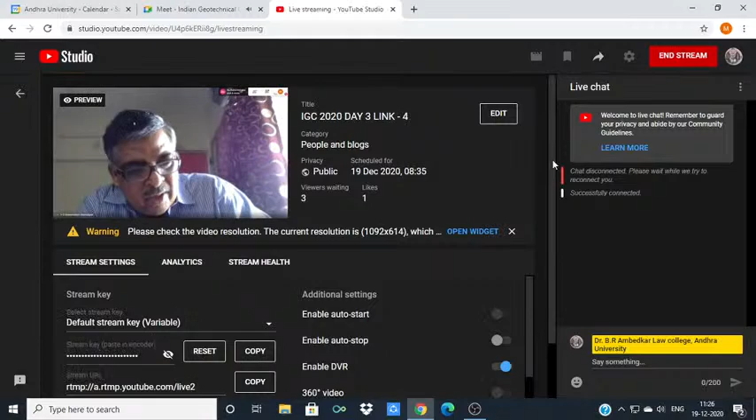Yes, in Calcutta, it was very nicely conducted. So everything is going fine with you? Yes, sir. IIT Bombay is relatively, the number of cases have reduced. That's what we talk nowadays. Only number of IIT Madras has increased. That's what we are talking with Professor Robinson, who is the chair, and Dr. Rajesh Sathiyamoorthy from IIT Kanpur is the co-chair. We were just talking about that only.

Good morning, Professor Mukherjee. Rajesh here from Kanpur. Very good morning. Manikant, Mani, Suhit Chakraborty. Dr. Dipankana, who graduated in 2008, no, Rajesh? Dipankana, you graduated in 2018, no? 18 or 19? Sir, 2018, end of 2018. Now she is with IIEST, no? Yes, sir, IIEST Shibpur. Oh, very nice. Assistant professor, and she is doing very well actually.

Dipankana was our student at Jammu. Yes, sir. Both Dipankana and her husband were also my students. Very recently graduated. And she got very good publications also, sir. Yes, I know.

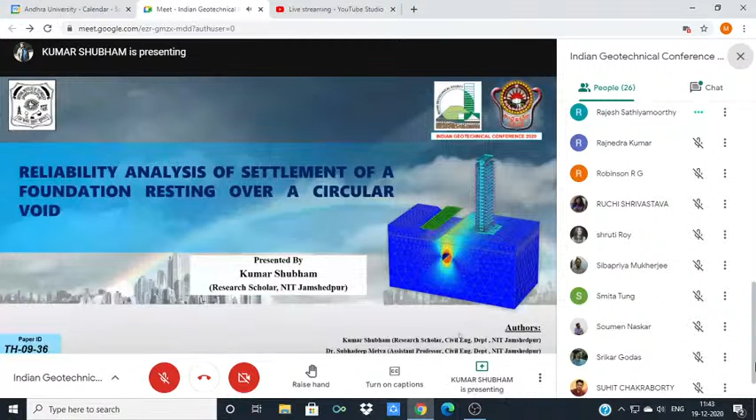A very warm good morning to all. I am Kumar Shubham, a research scholar from NIT Jamshedpur, and I am going to present my paper entitled Reliability Analysis of Settlement of a Foundation Resting Over a Circular Void.

Coming to my part, voids may occur due to the presence of tunnels, conduits, mining activities, and solution cavities in the bedrock. Due to rapid urbanization and scarcity of land for construction, underground construction is becoming very popular nowadays. But the existence of such underground structures like voids may affect the structures in the vicinity.

In most cases, voids formed after construction are not accounted for in the design of the foundation system. So this present study involves the determination of settlement of footing over a void and its reliability analysis.

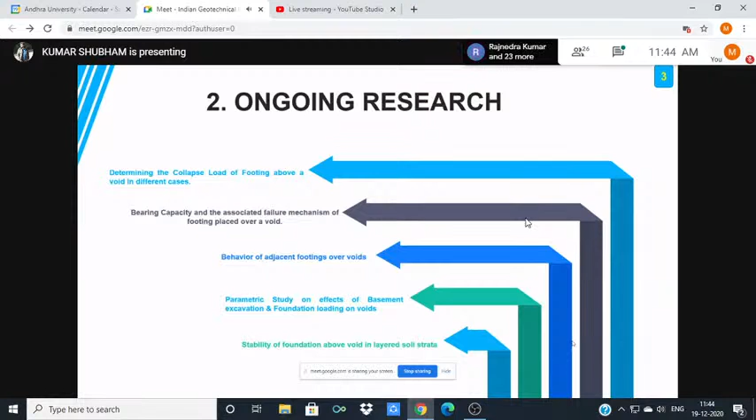At present, there are many research works going on, like determining the collapse load of footing, bearing capacity associated with the failure mechanism of footing resting over a void, and behavior of adjacent footings over a void. Basically, we have redeveloped a model based on Baus and Wang. They carried out a model footing test, and we readapted that model and redeveloped it in Plaxis.

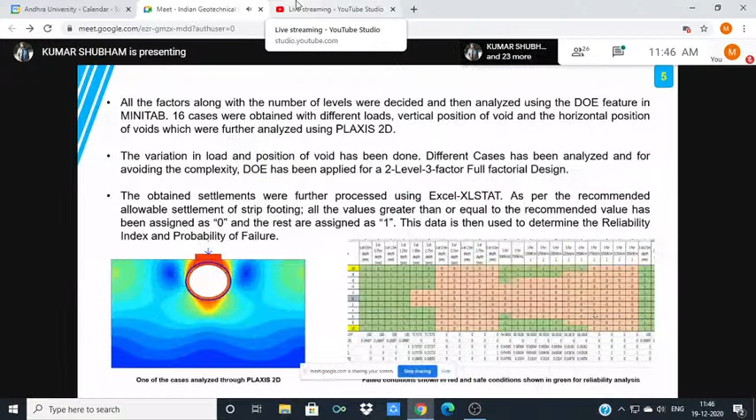Load and position of voids. To decrease the complexity of the problem, we used the design of experiment concept for a two-level, three-factor full factorial design. After obtaining results from the studies using Plaxis 2D, they were processed in XLSTAT, where we reassigned the values: failed cases were assigned 0, and safe cases were assigned 1, and then carried out the reliability analysis.

Coming to the results for individual variations, first we have the effect of vertical position of void. It can be seen from the graph that for a variation from 0.5 to 1.75 meters, there was just a minimal increment, and after that there was a sudden jump. Secondly, for the eccentricity, that is the horizontal position of void, after 1.75 meters there was a sudden increment in the settlement, and it was also not in the permissible limit.

When we increase the load from 50 to 350 kilonewton per meter square, it was observed that the increase in displacement was as we had presumed. So there was no sudden difference from the literature.

Regarding the reliability index and probability of failure, the reliability index was calculated to be 0.894, and the probability of failure was 0.185. Also, the Cronbach's alpha obtained was 0.965, which shows the consistency of data. The values of reliability index and probability of failure show a hazardous condition if we consider the risk according to the settlement of foundation.

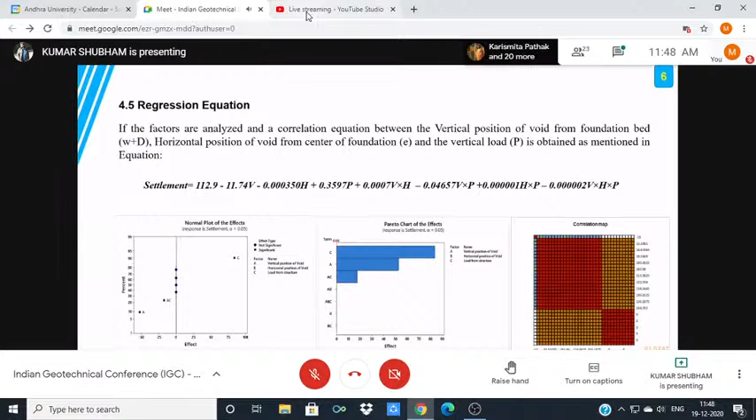Coming to the regression equation part, prediction of settlement can be done through this equation. Considering the interdependency of the parameters, we can say that eccentricity does not play a vital role on settlement. Individually it is affecting, but if we consider all three parameters together, it is not affecting that much.

Coming to the conclusion, as the depth of center of tunnel increases from 0 to 3 meters, the surface settlement increases first and then decreases. This means the influence of tunnel location on ground settlement decreases as the depth of void increases up to a certain depth, that is the critical depth.

It can be concluded that within a certain range of vertical location, the effect of depth of void is maximum. We are also working to determine the vertical critical zone, but that is not part of this paper.

Due to the increase in depth of void, the overburden pressure increases, and simultaneously the values of axial force, bending moment and shear force on tunnel lining also increase. Third, no phenomena was observed that demarcates the inverse effect of loading on settlement. However, it has been observed that with increase of horizontal distance from the center of foundation, the settlement decreases.

Lastly, reliability analysis became important as a solution for the presence of uncertainties in the result of failure of a structure using deterministic approach, because it is a complex procedure. Using the FORM method, the reliability index for footing over a single void was found to be 0.894, and the probability of failure was 0.185. So from the USACE chart, it can be said that it was hazardous under standard conditions.

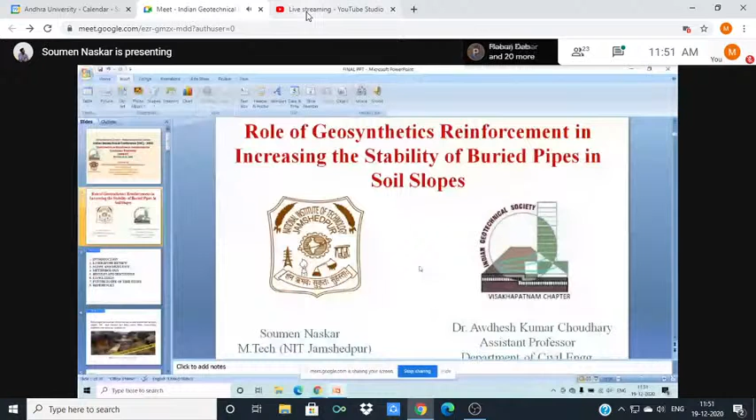Soumen, can you put the full slideshow? Yes, sir. These are basically the contents. Can you put slideshow mode? So now is it okay? No, you press this right side button, slideshow. Use slideshow. F5. So now is it okay? Now it is good.

Yes, sir, so can I continue, sir? Yeah, please proceed. Well, yes, sir.

Good morning, everyone. I'm going to present my presentation on the role of geosynthetics reinforcement in increasing the stability of buried pipes in soil slopes. These are basically the contents of today's presentation, and I'd like to give a brief introduction of my topic.

Buried pipes are used for numerous day-to-day works such as water supply, oil, natural gas, and electrical conduits, etc. During their course of laying, they have to travel large distances, and at times pass through severe adverse topographic conditions such as slopes, embankments, and others. At times these slopes may fail due to various external forces such as earthquakes, landslides, heavy rainfall, due to which failure of buried pipelines takes place within its vicinity.

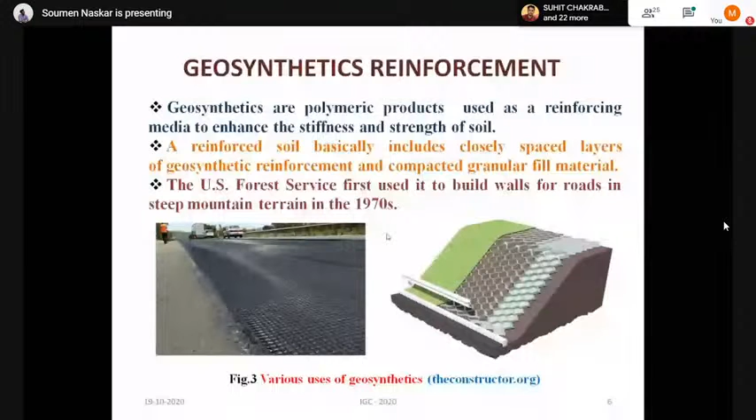These are basically the literature review. I went through various papers, and based on that, I arrived at my objective. I found that although numerous researches have been carried out on buried pipelines located on level land, very few researches have been carried out on buried pipelines located near slopes.

Based on that, I carried out my modeling using numerical analysis, and the influence of various parameters such as slope angle, relative density, edge distance of footing, and horizontal and vertical position of pipe on the behavior of footings have been studied in this model.

These are basically the pictorial representation of my modeling approach, and these are the simulation steps used for modeling. I won't go into detail, but in a nutshell, features such as staged construction and various soil models present in Plaxis 3D enable the user to have a more accurate simulation of various construction and excavation processes.

Now I'd like to continue with my results and discussions. First, I have validated the numerical results with experimental work conducted by Lee and Manjunath during the year 2000. From the graph, it can be seen that there is a slight error, and this might possibly be due to error in simulating the soil properties reported in the literature.

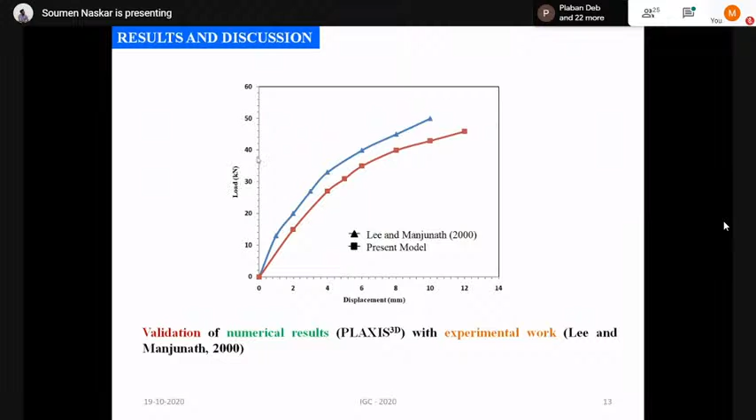So I have basically conducted my modeling in two phases. First, I considered the unreinforced slope, and next I introduced GeoGrid in it, and carried out further analysis with a reinforced slope.

In the beginning, I varied parameters such as slope angle, relative density, and edge distance of the footing. Slope angles of 20 degree, 26.5 degree, and 30 degree have been considered in the analysis, and it has been seen that load carrying capacity reduces with increase in slope angle. So the slope angle of 20 degree has been considered the safest angle for analysis in this paper.

Next, I varied the relative density, and it can be seen that the load carrying capacity of the footing increases with increase in relative density. Therefore, a relative density of 85% has been considered in this study.

Last, I varied the edge distances of the footing, and it has been seen that as we move away from the slope, the load carrying capacity of the footing increases. That means when the b by B value is 5, it gives the maximum load carrying capacity. But to stay with the actual analysis of the slope, we considered b by B equal to 2 in this numerical analysis.

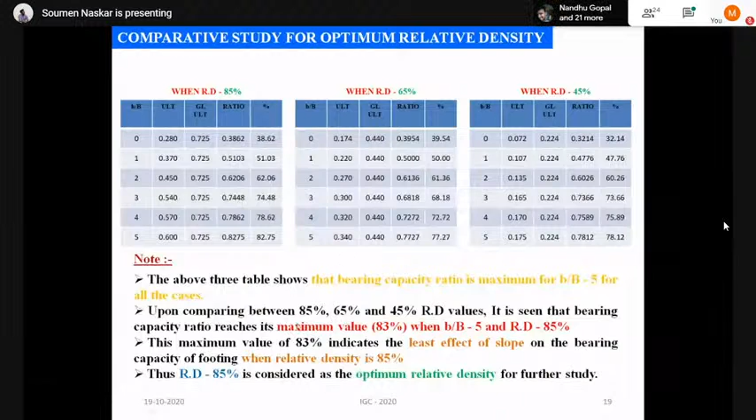Next, once the slope angle, relative density, and edge distance have been fixed, the pipe has been introduced in the model. At first, the pipe has been varied in the vertical direction, and it has been seen...

Sorry. Kindly go to the conclusion. Yes, sir, yes, sir. Sir, when the pipe depth...

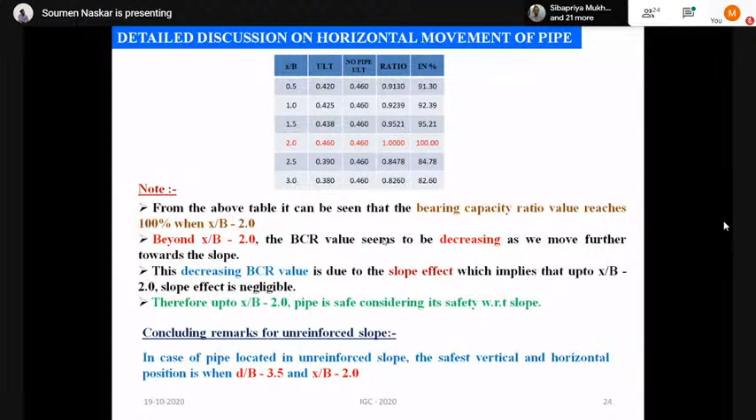It has been seen that when the pipe depth d by b is equal to 3.5, it gives the maximum value. Similarly, for horizontal variations, it has been seen that when the x by b value is equal to 2, the slope effect is negligible. Therefore, in case of unreinforced slope, the safest vertical and horizontal position is d by b equal to 3.5 and x by b equal to 2.

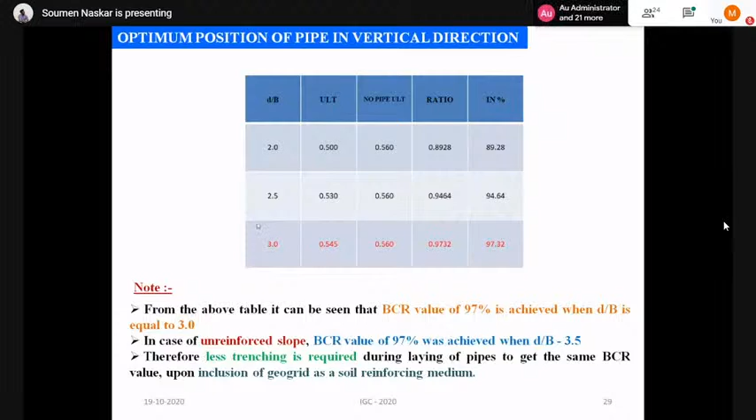Next, once the position of the pipe has been fixed for the unreinforced slope, geogrid has been introduced in the model, and the pipe has again been varied vertically and horizontally. It has been seen that when the depth of the pipe d by b is equal to 3, the bearing capacity ratio gives the same value as in the unreinforced slope case where d by b is equal to 3.5. Next, the horizontal distance of the pipe has been fixed at 2.5 in case of the reinforced slope.

In conclusion, I can say that the load carrying capacity of the footing can be improved with the inclusion of geosynthetics, and the embedment depth of the pipe can be reduced with the help of geogrid. This will further help in reducing the trenching cost incurred during laying of these pipelines in soil slopes. Second, the pipes can be placed closer to the vicinity of the slopes, as the x by b value is increased in case of reinforced slope. Above all, geosynthetics in the form of geogrid is helpful in improving the overall stability of buried pipelines.

Thank you. These are the references. Thank you.

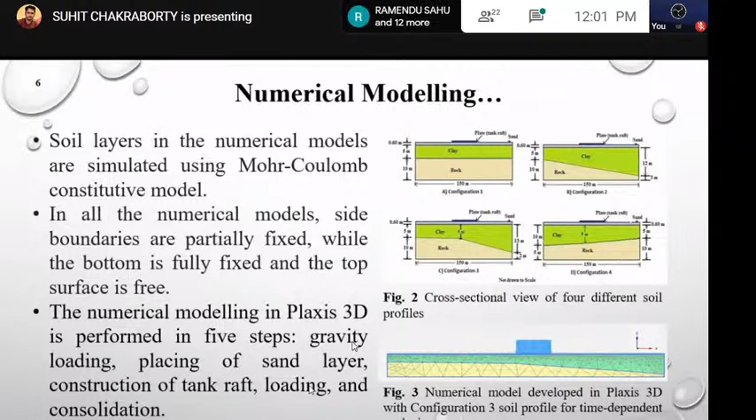Settlement profile of all configurations is monitored starting from the loading stage to the 90% consolidation stage. Configuration 1 has a uniform depth of soil layer, and the rest have variation in the depth of soil layers.

To validate the study, we chose a case study from Ramdan et al. 2013 and compared it with the present numerical model. We found the results are in good agreement.

Results from the numerical analysis show there is both differential settlement as well as tilting in the storage tank structure in configurations 2, 3 and 4 respectively up to the loading stage, and it increases further with consolidation. Configuration 1 has not suffered any tilting since it is uniform throughout.

The result of time-dependent analysis of configuration 3 is chosen here for representation, since it suffered maximum tilting of 23 mm up to the loading stage. After 90% consolidation, that tilting crossed about 105 mm, which is almost 4.5 times the initial tilting after the application of surcharge.

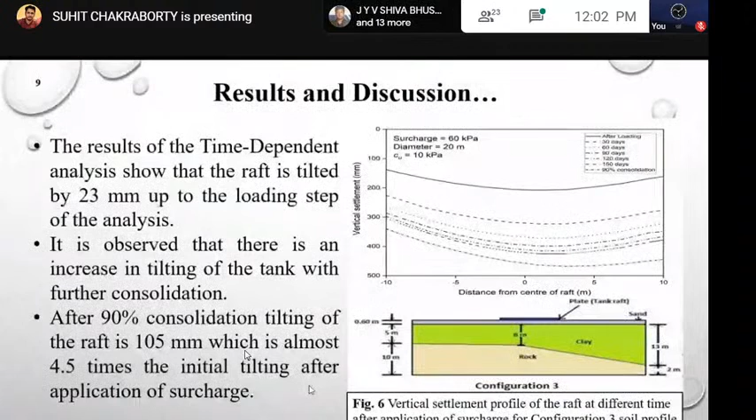Going to the parameters, it is observed that with an increase in the undrained cohesion of the soft soil as well as an increase in the stiffness of the soil, tilting of the structure reduces.

Tilting is a function of consolidation settlement which increases non-linearly with surcharge intensity and time. Tilting is observed to increase disproportionately with an increase in intensity because the rate of consolidation settlement increases with surcharge intensity but decreases with time.

It is also observed that the change in tilting of the structure with time is almost linear for rafts of lower diameter, whereas it is non-linear when the diameter of the raft is large.

In conclusion, differential settlement may occur even in a foundation resting on uniform soft soil, but tilting is governed by the change in the thickness of the compressible layer.

An important point is that we considered tilting as the difference of settlement between the two opposite edges of the structure. Tilting of the structure increases with time as consolidation of the soil progresses.

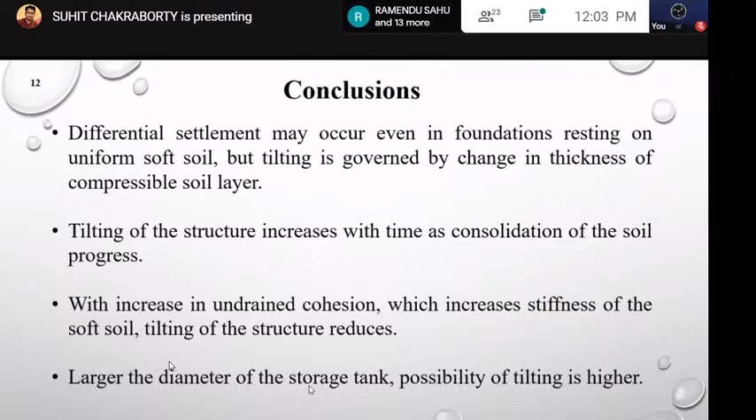With an increase in undrained cohesion of the soft soil as well as stiffness of the soil, tilting of the structure reduces. Third, with increase in the diameter of the storage tank, the possibility of tilting is higher.

These are the references which I have gone through for the present study, and thank you.

Thanks, Suhit, for a nice presentation and sticking to your time. It's an interesting study. If you have some questions, we can post them.

I have one question, am I audible? Yes sir. I want to ask whether you have studied these consolidation parameters, and have you considered 3D consolidation, or have you gone with the traditional one-dimensional consolidation?

Sir, I have prepared a 3D numerical model in Plaxis 3D for consolidation. Plaxis 3D consolidation.

Regarding the drainage condition, have you considered lateral confinement? Sir, I have considered lateral confinement as well as the bottom being confined since it is a rock layer, which is non-porous, and only the top layer is unconfined.

So basically this is a one-dimensional consolidation condition. Yes, you can see that. But in Plaxis 3D you have also considered this condition, no? As you told me, laterally it is confined and the bottom is confined. Yes, sir. Okay, thank you.

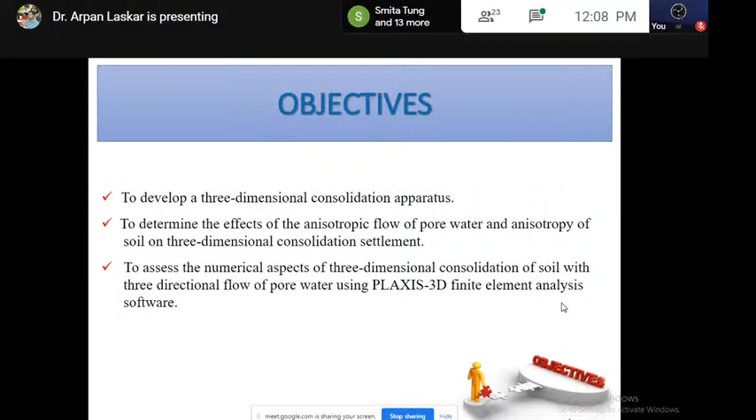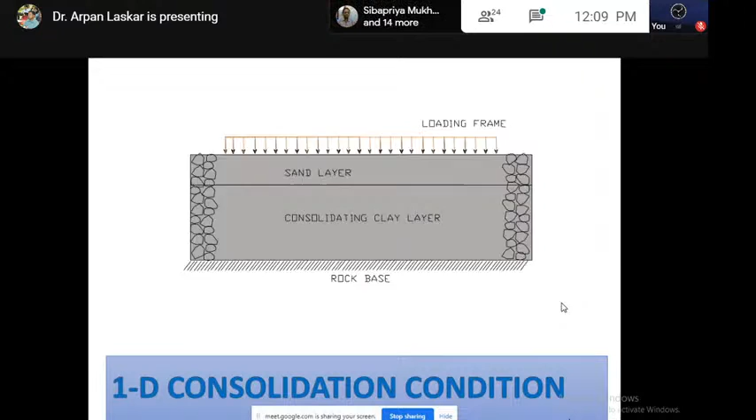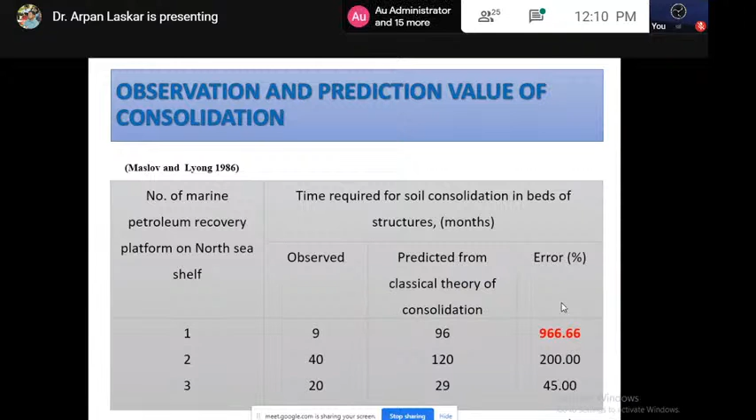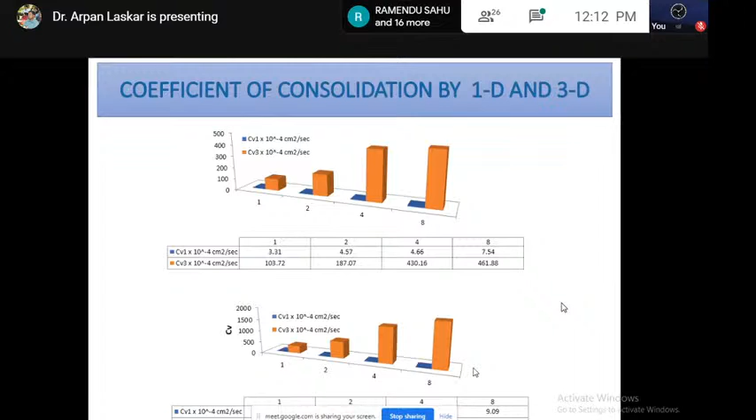And this is the coefficient of consolidation by 1D and 3D. Here you can see the coefficient of consolidation is higher in the 3D consolidation test, because in the 3D test we allow lateral expulsion of pore water and lateral movement of soil particles, which does not happen in one-dimensional consolidation. That is why the coefficient of consolidation is higher in 3D consolidation.

Coming to the 3D consolidation under anisotropic permeability condition.

Arpan, sorry to interrupt. You have 1 minute left. Okay, sir.

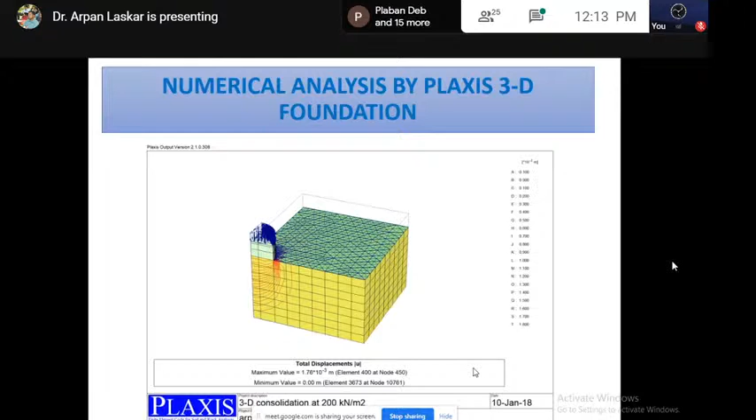In numerical analysis, I have used Plaxis 3D, and this Plaxis model shows the settlement under 200, 150 kilonewton per meter square, and this is the final.

So if we chose 3D consolidation in place of one-dimensional consolidation, it could represent the actual field condition in a better way. That's all. Thank you, sir.

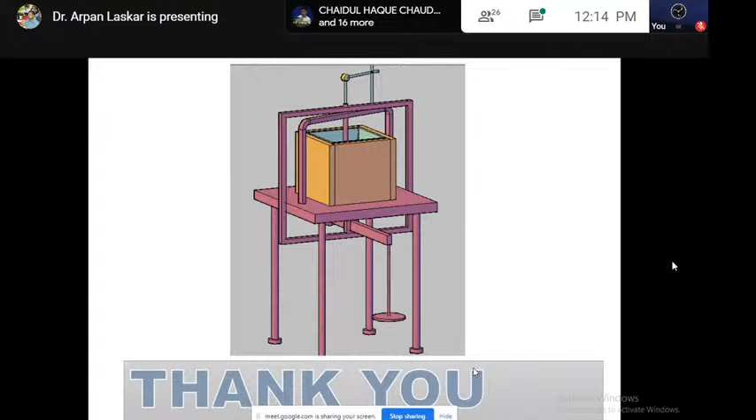Thank you, Arpan, for this presentation. See, I have a small comment. 1D consolidation has its own advantage. Okay, and it is meant for some other field situation, right? So it's for geostatic stress condition. So based on the field situation, you will have to use different test setup.

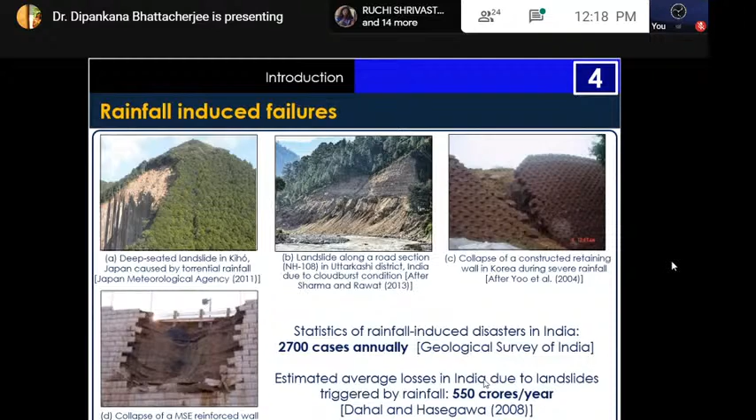The problem of this instability aggravates if good quality permeable granular material is not available for backfilling. This eventually leads to the use of locally available low permeable soils, or marginal soils as they are referred to, at the construction site. Hence, the aim of my present study is to investigate the response of slopes constructed with marginal soil subjected to rainwater infiltration. As far as the modeling technique is concerned, centrifuge-based physical modeling has been selected in this study for understanding the actual physical phenomenon involved in this failure process.

I have resorted to centrifuge-based physical model testing, wherein the model is subjected to a centrifugal acceleration having magnitude n times higher than that of the Earth's gravitational acceleration. The mechanism of rainfall-induced landslides has been investigated by monitoring the deformed slope profile, the slope face movements, the crest settlement, and the pore water pressure generation with rainfall. In order to extrapolate the model response to that of the prototype, we need to derive standard scaling laws linking the model behavior to the prototype.

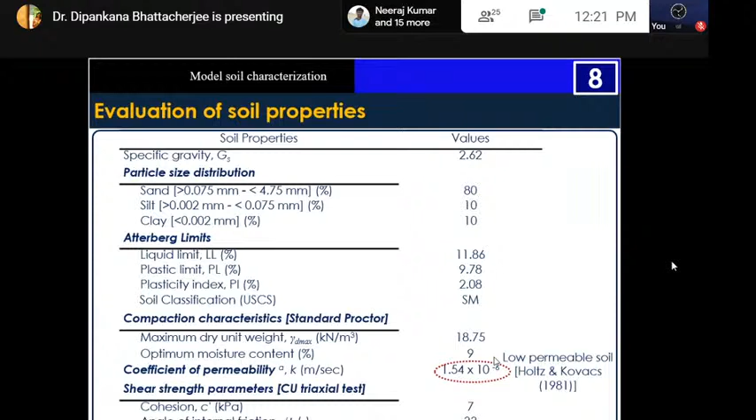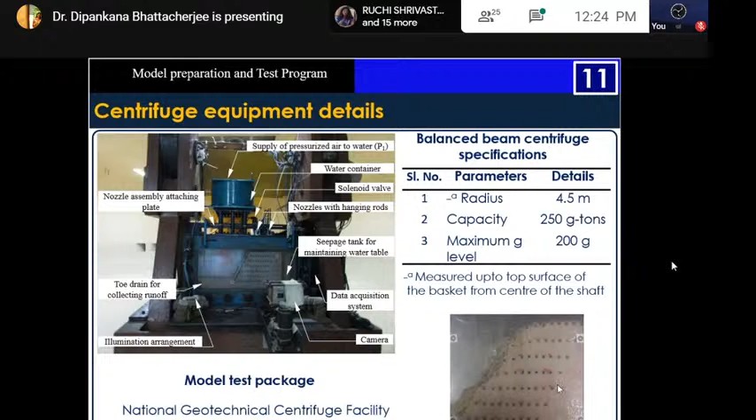As we observed, a kind of a deep-seated failure was encountered in this case on account of deeper rainwater infiltration into the slope, and we observed multiple sliding stages in the first case. On the contrary, the second case, the model T3 subjected to 20 mm per hour rainfall, underwent a very clear and distinct sliding failure about the toe just about 15 minutes into model dimensions. The failure time in this case was about 15 minutes.

And T4, which is subjected to a heavy torrent of 50 mm per hour, failed catastrophically and almost instantaneously within just about 6 minutes of rainfall due to extensive erosion. The failure in this case, let me say, resembled more or less a mass block-based sliding. So the slope failure pattern is dependent on the ratio of the saturated soil permeability to the input rainfall flux.

And the time which I have highlighted, I have monitored this up to a point of time when neither the pore water pressure transducers nor the slope movements changed significantly with the progress of rainfall. So that is taken as the ultimate failure time up to which we had monitored. Neither the movements nor the pore water pressures changed drastically beyond that point of time. So that is regarded as the ultimate stage of centrifuge tests in all these cases here.

As far as the other image analysis results are concerned, like the crest movements and the face movements. Sorry to interrupt, Dipankana. Yes, sir. Maybe you will have to conclude soon. Right, surely, sir.

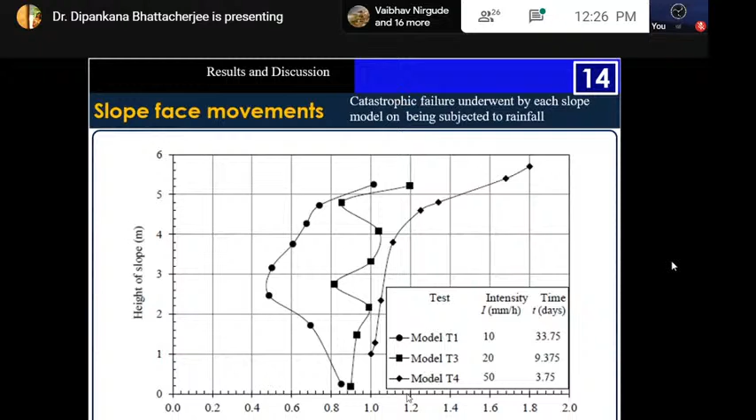As far as the crest settlements and face movements are concerned, definitely all the 3 models failed, but the failure was more or less of a gradual kind for the first model as compared to the later 2. And the same here for the pore water pressure measurements. For the model T1, we observed a very slow and steady rise in pore water pressure, where each stage of sliding corresponded to a stage of increase in pore pressure.

So whatever I have discussed here, I have highlighted here. These are the research highlights, and I have tabulated my results here. Presently, we are working on how to mitigate this instability and trying to work out whether drainage is governing or reinforcement is governing. We have developed a kind of an innovative hybrid geosynthetic. So that's an ongoing research.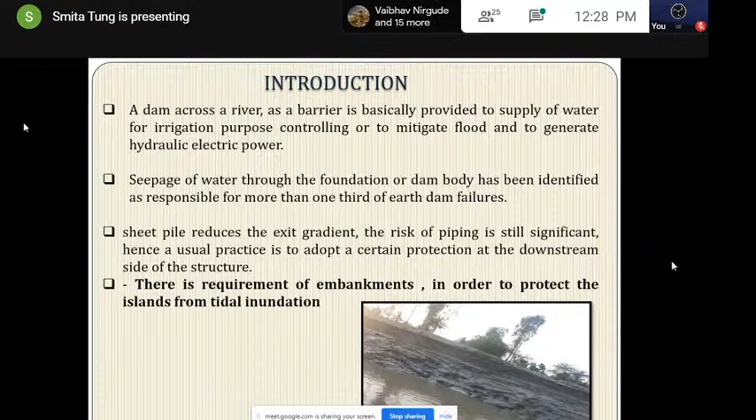Now, based on this motive, my objective of the present study is to analyze the seepage behavior of the earthen dam and foundation using sheet pile as a cutoff under steady seepage condition. To study the seepage analysis, my model of earthen dam is 17 meter wide and 4 meter height with 2 to 1 slope. This is the model. And the variation of the sheet pile length is 5 meter length, 10 meter length, 15 meter and 20 meter length with different positions like B by 8, 2B by 8 and 3B by 8 position. The output parameters studied are flow net pattern, fluid flow vector and factor of safety.

In the present research, basically we use centrifuge technology to study the flow path using sheet pile as a seepage barrier. A series of tests have been performed to study the flow path, fluid flow vector and factor of safety. Basically, centrifuge modeling is a technique that's subjected to gravity force to analyze scale models from the prototype.

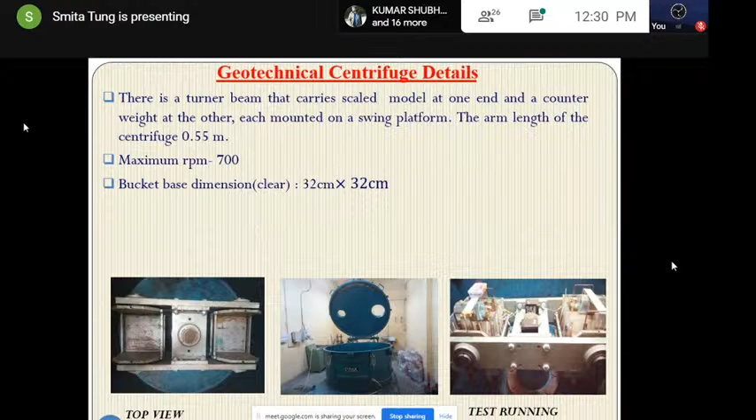The arm length of the centrifuge of Jadavpur University is 0.55 meter and the corresponding radius is 1.1 meter. For geometric and stress similitude, model dimensions are n times smaller than the equivalent prototype. The area is scaled as n square, volume as n cube, time will be scaled as 1 by n square, and seepage velocity will be scaled as n.

The geotechnical centrifuge of Jadavpur University is a beam type that carries a model at one end and a counterweight at the other end. Real-time control of the water level is an important aspect, and this control system is composed of inlet and outlet control valves and an IR sensor. The image data acquisition system is controlled by RPI, connected with MATLAB and Wi-Fi.

This is some centrifuge modeling. The first one is the captured image and the second one is the processed image. The flow net has been obtained from the particle image velocimetry technique, by capturing successive images as sets of patches. The movement of each patch is traced by the cross correlation function of PIV. Flows are interrogated manually and also by visualization of the magnitude of the x and y components of the velocity at different points and at different times.

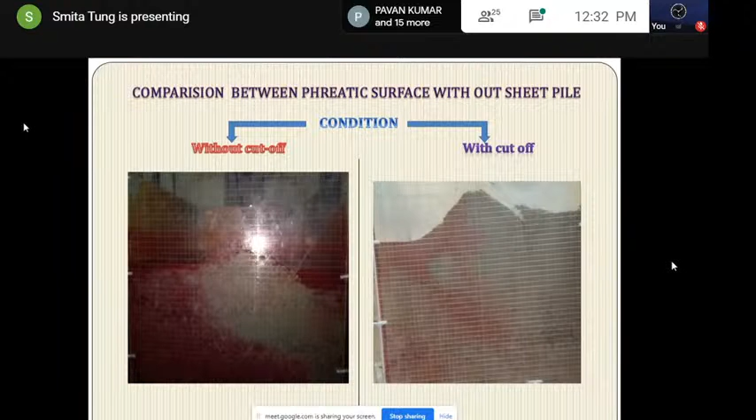Now coming to the presentation part, the phreatic surface with cutoff and without cutoff has been effectively studied by the PIV technique. It has been observed that the sheet pile acts as a fluid barrier effectively. When the sheet pile is shifted towards the downstream end, the average dimension of the last element of the flow line decreases. When sheet pile length increases, the seepage path increases and reduces the exit gradient.

It has been obtained that when sheet pile length increases by 30% of the bottom width of the dam, exit gradient decreases by 9.97%, and when sheet pile length increases by 59% of the bottom of the dam, exit gradient decreases by 18.16%. It is also evaluated that if sheet pile length increases by 30 to 59% of the bottom of the dam, the exit gradient decrement is also proportional to the sheet pile length.

Now coming to the fluid flow vector. The fluid flow vector, as all of you know, is discharge per unit area. In this figure, the negative sign indicates that the fluid flows in the downward direction. At the position of the sheet pile, there is an abrupt jump. When sheet pile length increases, fluid flow is less; fluid flow decreases for the 20-meter length, that is 30% less compared to the 5-meter length at any fixed position.

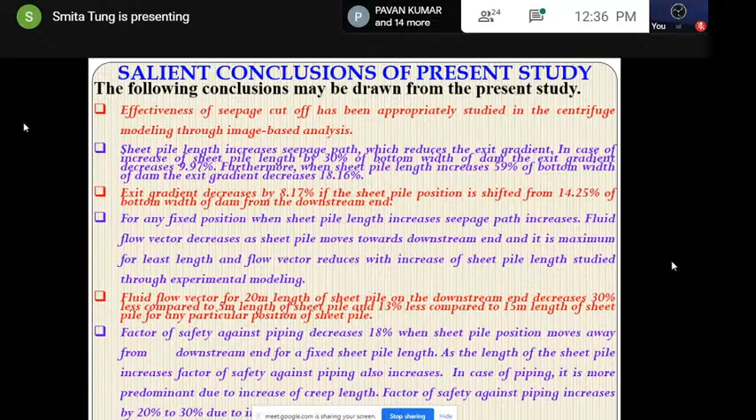Thanks, Smita, for a good presentation. Happy to see the results from the small centrifuge test. So I can take one question if anybody has.

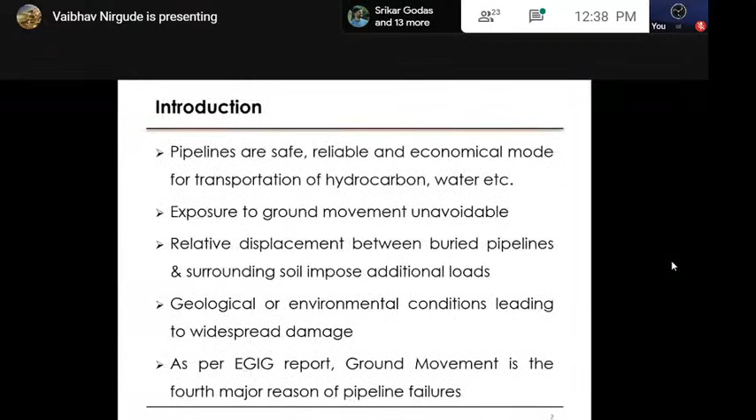Before going for the research study, we carried out the literature study in three domains: analytical, centrifuge, and numerical. In the analytical domain, we found that Newmark and Hall initiated this pioneering work addressing pipeline subjected to fault, and the formulation is developed considering pipeline as a cable, which was developed by Kennedy et al. for accounting the friction part, and that is considered in ASCE standard, which is now becoming a standard guideline to design these kinds of pipelines.

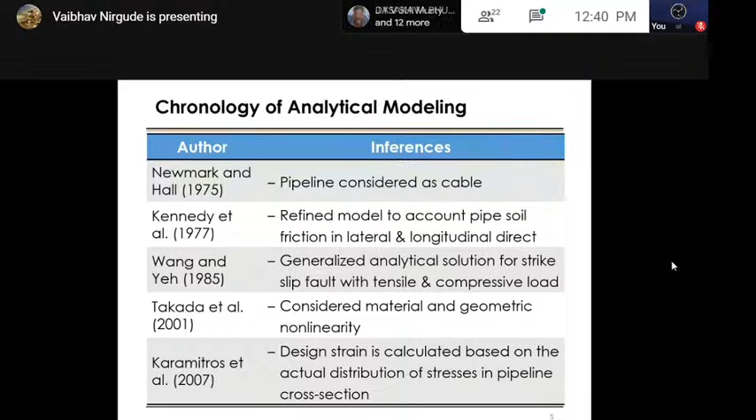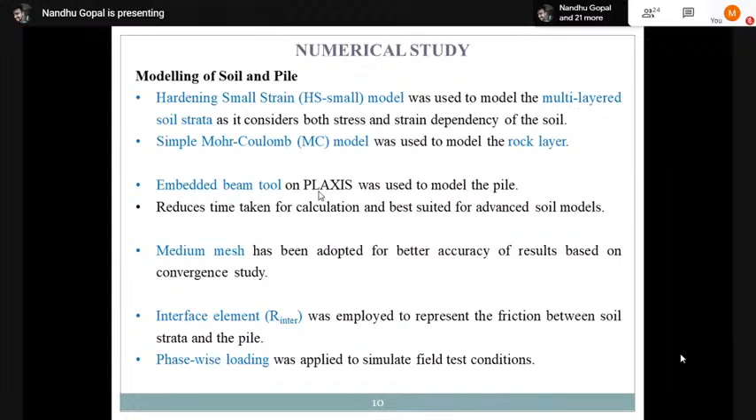For the soil, we used the HS small strain model, and in case of the rock, we used a simple Mohr-Coulomb model. The embedded beam tool was used for modeling the pile, and a medium mesh was used based on convergence study. Interface elements were used to represent the friction between soil and pile. We considered phase-wise loading to simulate field conditions, and these are the boundary conditions used.

So in our case, based on our study, we have taken IS 14593 as the reference code, and the lateral load capacity of the pile was taken as the load corresponding to a lateral displacement of 4 mm. And we have also considered cases on a horizontal ground.

Undisturbed horizontal ground is taken as the ideal response. And for the zone of influence, if the lateral load capacity of a pile is reduced by more than 5%, this pile is considered to be within the zone of influence of the effect of slope.

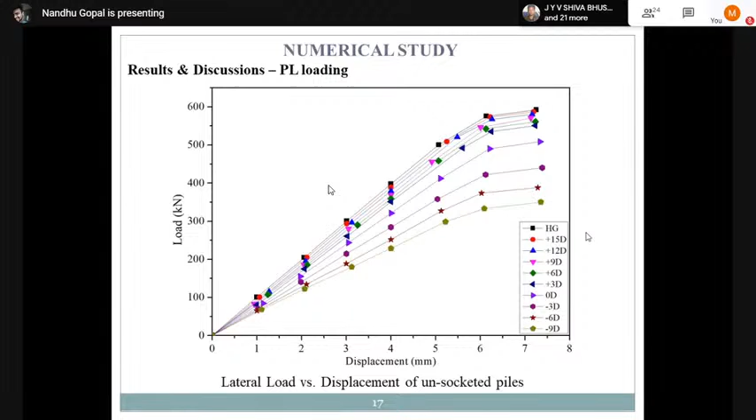So a similar trend is observed in the socketed piles as well, although the values of lateral load capacity are significantly higher. This is the comparison of lateral load capacity. We can see that the lateral load capacity of the piles increases with the increase in the depth of socketing, irrespective of its position.

So these are the discussions we have discussed already, and we can also see from this figure that the rate of decrement of lateral loading is reduced when the depth of socketing is increased.

These happen because the reduction of embedded depth occurs when the pile's position moves onto the slope, and this is because the resisting volume of the soil in the passive wedge is reduced, and therefore the piles on the slope are more dependent on the rock stratum to carry their lateral load.

So we can see that the pile on the extreme slope side is what gains the most out of the effect of rock socketing, and it is improved by 42.05%.

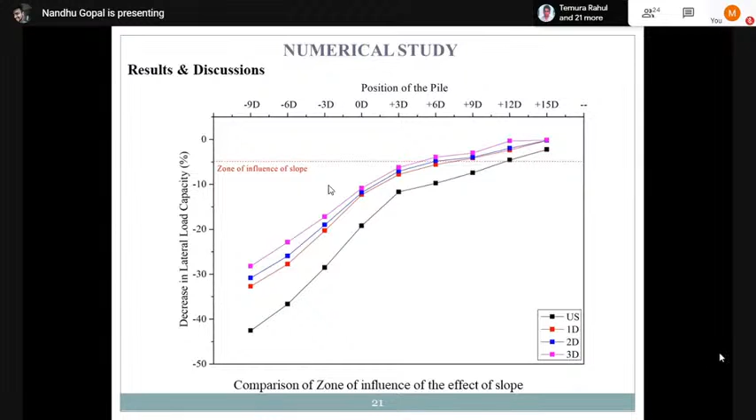This is the comparison of zone of influence, and we can see that from the unsocketed pile, which has a zone of influence up to 12 times the pile diameter, it has reduced to between 6D and 3D in case of a 3D socketed pile.

So based on this, we can say that rock socketing is a very viable solution for the problem. So these are the conclusions which I have given.

The increment of lateral load increases with the increase in the depth of socketing irrespective of pile position, and the effect of rock socketing is more effective on piles situated on the crest and on the sloping ground as compared to the piles on the embankment.

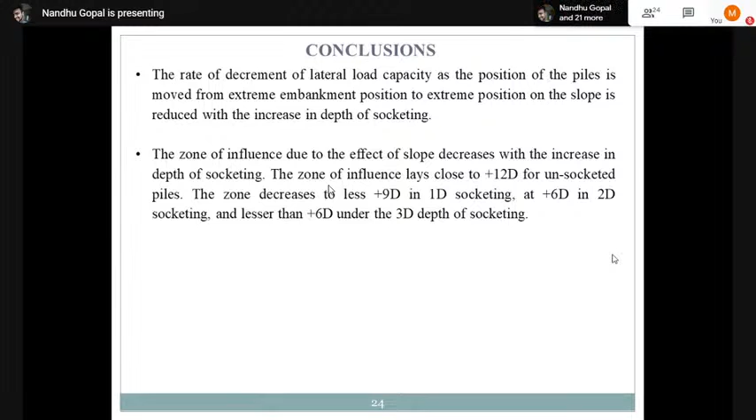The rate of decrement of lateral load capacity as the position of the pile is moved from the embankment to the slope, then the zone of influence due to the effect of slope decreases with increase in the depth of socketing. These are my conclusions. Thank you.

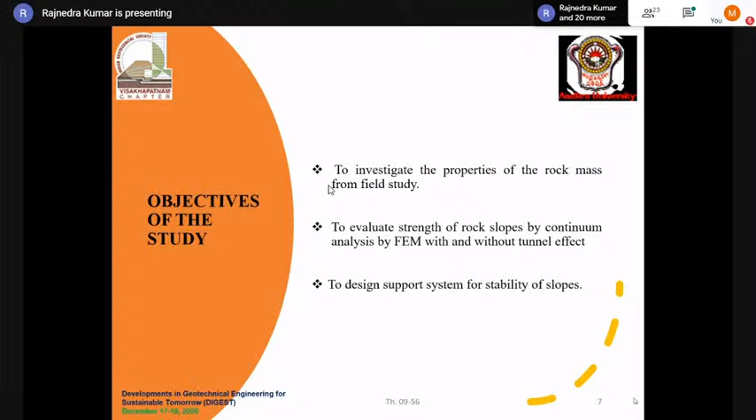This is my objective of study. I have to investigate the properties of the rock mass from field study and evaluate the rock slopes using continuum analysis by FEM, using Phase 2 software. Then I have to design the support system for the slope stability.

This is the methodology. I have collected material properties from field data from the Polavaram Left Bank Irrigation Channel, and based upon the field data, I have done some laboratory testing. Then rock mass properties and intact properties were obtained from field as well as laboratory tests. Based upon these properties, I analyze the slope profile using continuum analysis with Phase 2 software.

For the case study, I have taken the Polavaram project. This is a small multi-purpose project having two canals, the right bank canal and left bank canal. The right bank tunnel is already completed, so I moved to the left bank tunnel. Here it is used for two purposes: one is irrigation, the other is navigation.

The dam is located in the area of the northern Eastern Ghat range, where the main rocks are gneisses and charnockites, with khondalites predominant. This is the basic geology of the Polavaram site.

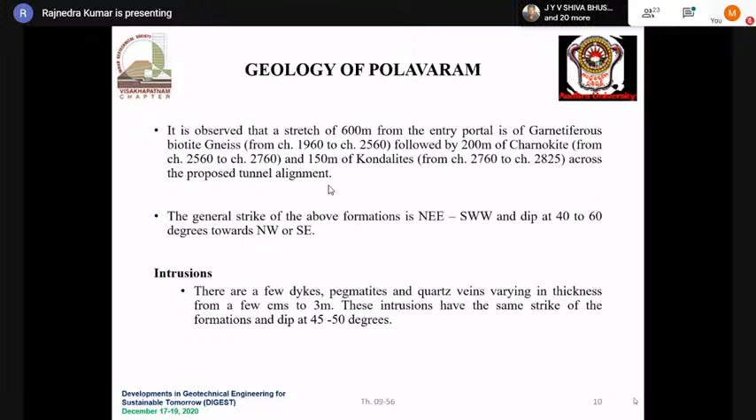There is a stretch of 600 meters at the entry portal of the tunnel where the slope is. The entry of the tunnel portal rock is gneiss. Then basic strikes of this area, and the structural discontinuities in the area, having minor shears, with a slope strike and dip of 40 to 60 degrees.

The strike is northeast-east. Some shears are present in the khondalite formation, along with some strike joints, dip joints, and oblique joints. So there are no folds and faults present in this area.

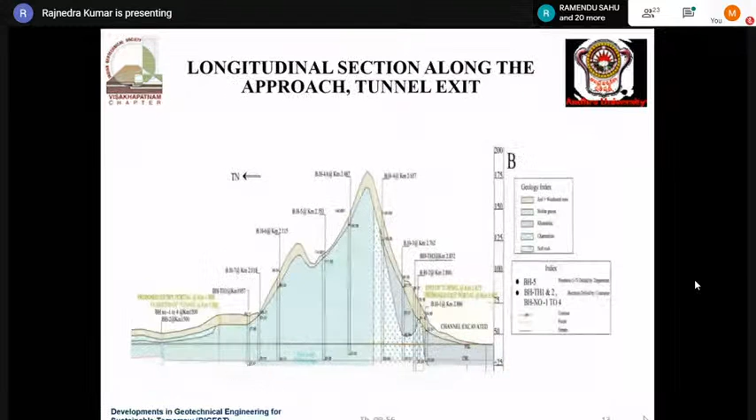I have used material properties for the left bank collected from the field data. Based upon the Hoek-Brown failure criteria, I estimated the composite strength of the rock from the entire rock sample collected from the field, based upon the GSI value, mi values, modulus, and disturbance factor taken from the literature. I have taken one difference: the disturbance factor.

Then I collected some samples and performed the point load test based upon some values. Using the ISRM correlation code, given based upon the point load test, I found out the uniaxial compressive strength of the rock.

By collecting these properties, the GSI values, RQD, Young's modulus, all these values were imported into the RocLab software. From RocLab, I found out the Hoek-Brown criteria parameters mb, s, and a, and the Mohr-Coulomb criteria parameters c and phi. These are the properties used for the analysis.

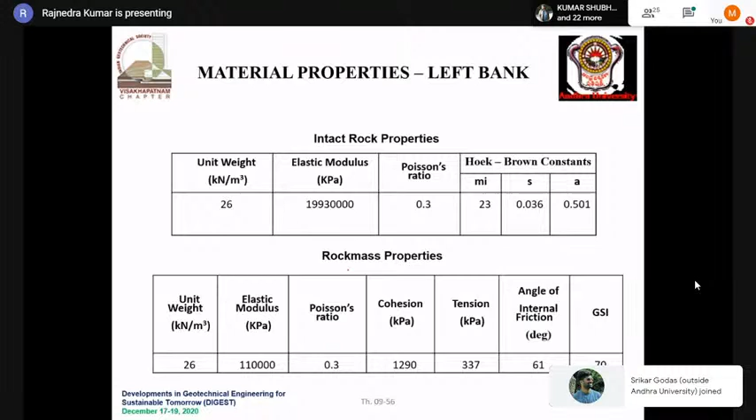One set is the intact rock properties from laboratory experiments, and the other is the rock mass properties collected from the field and from the RocLab software. So these are my analyses. In this analysis, I simulated the continuum model, but the continuum model has some maximum ground displacements to capture the movement of loose blocks.

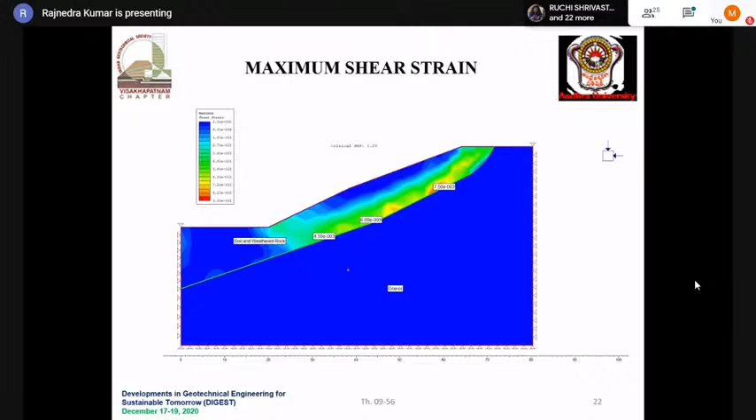So I get the critical SRF value, strength reduction factor, as 1.29. This is the displacement occurring along the loose rock. Here, this is the boundary between the loose rock and the hard rock. From here, the failure will be occurring. These are the yielded elements. This is based upon the strength reduction factor versus total displacement curve.

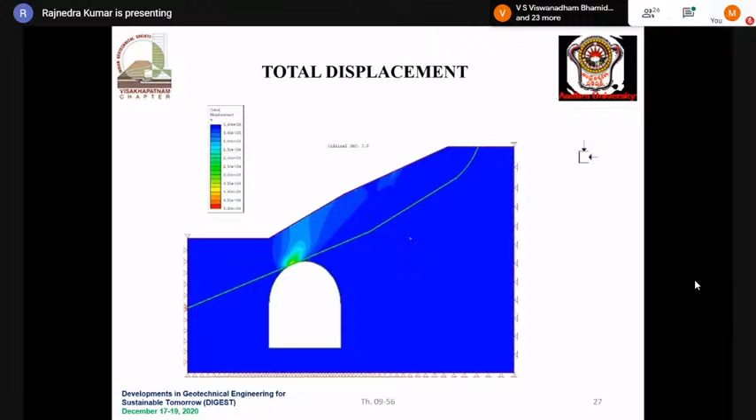Then I incorporate the tunnel effect in the same continuum analysis profile. Based upon the tunnel excavation, there is some disturbance in the rock mass. So over the tunnel face, the tunnel portal, the loose rock is going to fail. Then my factor of safety reduces to 0.8. Earlier it is 1.29.

Then I model the rock bolts in the analysis. I've taken the length of the rock bolt as 10 meters. Then my factor of safety increases to 1.64, from 1.29 without tunnel effect and 0.8 with tunnel effect.

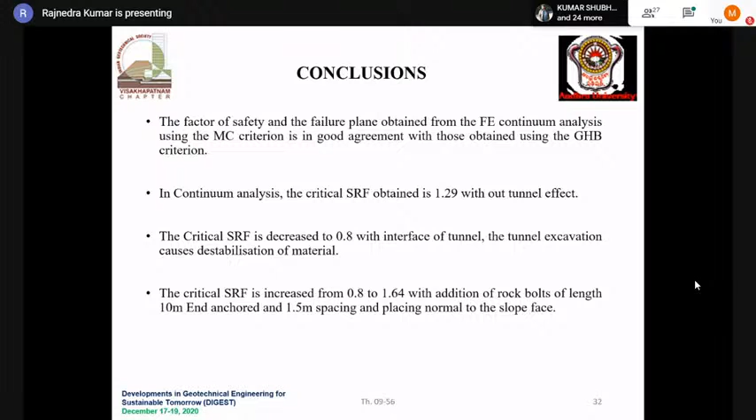These are my conclusions. I have used the FE continuum analysis using the Mohr-Coulomb criteria as well as the generalized Hoek-Brown criteria. In continuum analysis, the critical SRF obtained is 1.29 without tunnel effect. With the tunnel, 0.8 is the SRF value. When I use rock bolts of length 10 meters, end anchored at spacing of 1.5 meters, placed normal to the slope face, my factor of safety increases to 1.64.

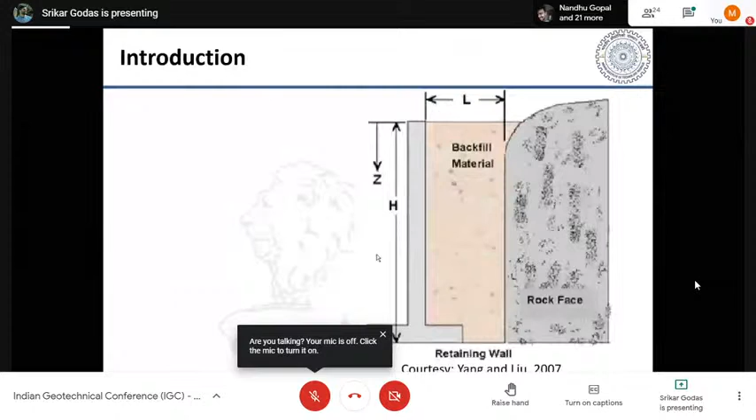hill area, and over the backfill we generally see pavements. Other such applications are if we are constructing or widening any road, we'll be using such walls where the backfill width is very much less compared to that of a normal retaining wall. So my area of study is retaining wall with narrow backfill, retaining structures built in front of a stable rock face or a stable wall.

In this case, conventional earth pressure theories like Coulomb's theory or Rankine's theory may not be applicable because they may overestimate the value, as the area of the wedge participating in the failure may be much less than that of a conventional retaining wall. So how to deal with the problem in such cases is my area of study.

Generally, a retaining wall problem is dealt with in three ways: limit equilibrium analysis, displacement approach, and experimental approach. In the limit equilibrium approach, we take a failure wedge where the area of the wedge may not be known, which can be obtained by optimizing the inclination of the failure plane.

And coming to the second approach, which is the displacement based approach, where we are going to construct a model in any finite element package like PLAXIS, MIDAS, or any other, FLAC or Abaqus, and then we are going to see how the wall is going to perform, how the whole geotechnical structure is going to perform in the numerical model. And the third, experimental approach, is the model type approach, where we can visualize practically the phenomenon or behavior of the geotechnical structure in a reduced scale.

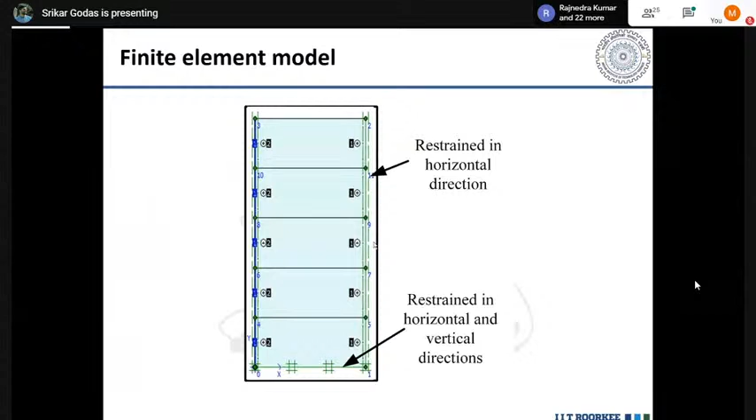And these are the model properties. I have adopted the Mohr-Coulomb model, the most basic model which we are frequently using. Elastic modulus I have taken as 30 MPa, Poisson ratio is 0.3, cohesion is 1 kPa. I have taken a very small amount of cohesion of 1 kPa, as my study is totally related to sandy material, cohesionless soil. But this small quantity will help me in numerically stabilizing the finite element analysis. And coming to friction angle, I have taken around 29 and unit weight 13.4 kilonewton per meter cube.

And normal stiffness of the plate material, which is nothing but the retaining wall, I have taken around 1.26 × 10^7 kilonewton per meter, and 4.2 × 10^5 kilonewton meter square per meter will be my flexural stiffness. These values are obtained from the literature study.

So my present model is validated first. The present model is validated using a centrifuge model test, which was conducted by Take in 2001. The major contribution of Take is to study the effect of aspect ratio, which is nothing but the width to height ratio of the retaining wall, on lateral earth pressure. The centrifuge model is simulated with a full scale model in the present study. The centrifuge model is accelerated with an acceleration of 35.7 g.

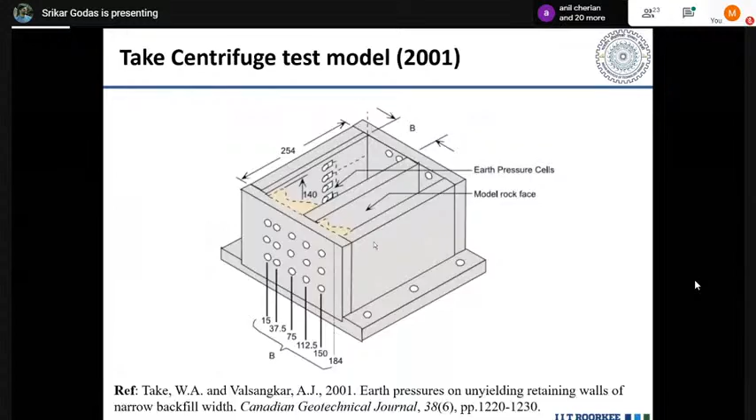So in my case, I have considered finite element mesh with varying widths. In the first case, at the bottom, B is about 184 mm, the second B is 75 mm, the third case is 38 mm, and 15 mm is the last case, the lowest aspect ratio, which is the most narrow case in my present study. These widths are fixed according to the centrifuge test conducted by Take. As it is my full scale, this 184 mm is going to represent a full scale width of about 6.57 meters, and 75 mm is going to represent about 2.67

Srikar, sorry to interrupt. Yeah, yeah, sir. Yeah, you have 1 minute left. Yeah, sorry. Yeah, I'll be concluding.

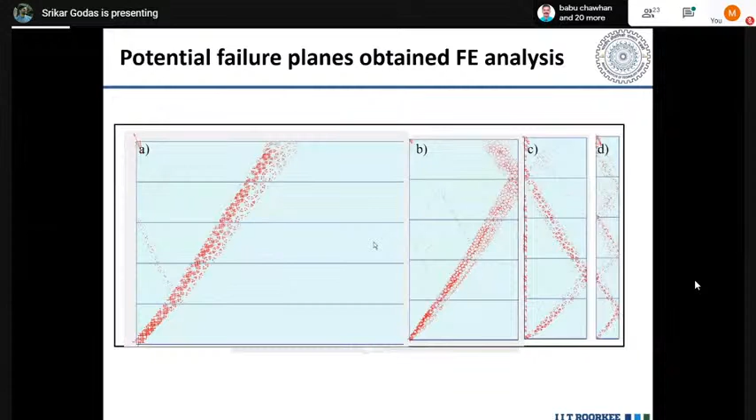So by seeing these results, I have compared my study with the analytical work conducted by Greco et al.

Srikar, kindly conclude. Yes, sir.

Conventional earth pressure theories result in uneconomical design for narrow backfill retaining walls. So the proposed methodology can be adopted with precise validation of the model, comparing the obtained results with available limit equilibrium analysis.

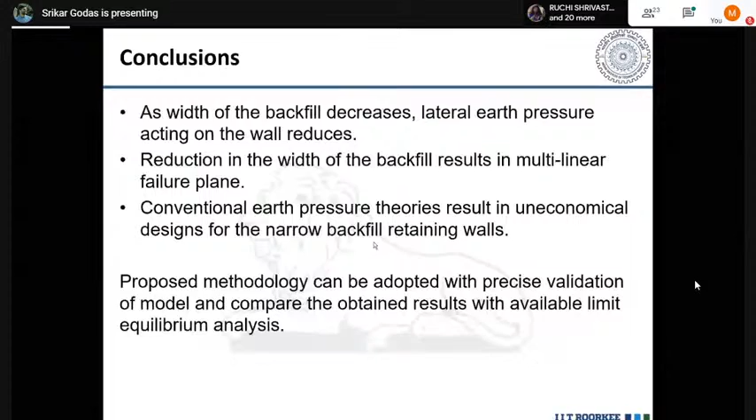Let's move to the next paper. Shrivastava is there? I have not seen her in the chat box. Paper number 58. I think she was there actually. Paper number 58. She's in the chat box, Rajesh. Yes, sir, I am present, sir. Yeah, kindly present. Share your screen. Sir, is my screen visible? Yes, yes. Please proceed.

So, good afternoon to one and all. At the onset, I want to thank the dignitaries and the organizing committee of IGC for allowing me to present my research work on theoretical simulation of experimental results with Barron's theory for consolidation of soft clay by radial flow using PVD. My guide is Dr. A.V. Shroff, Professor Emeritus, MS University, Vadodara.

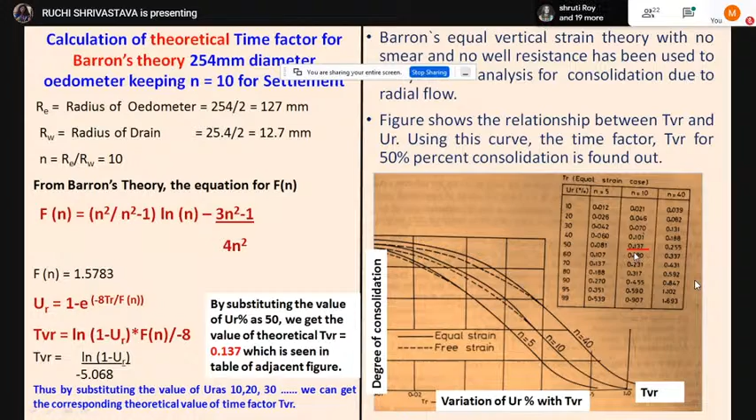So basically, the experimental setup that we have adopted is from MS University, Vadodara, which is a Rowe type hydraulically pressurized oedometer with modified arrangements for measuring pore pressure at 3 radial points by a Bishop pore water setup and settlement by dial gauge.

The top plate has got a central vertical stud on which the dial gauge is fit, so that under the application of hydraulic pressure, there is settlement as well as simultaneous dissipation of pore water pressure taking place, and thus we can measure the settlement in the dial gauge and the pore pressure at 3 radial points with the help of Bishop's pore pressure system.

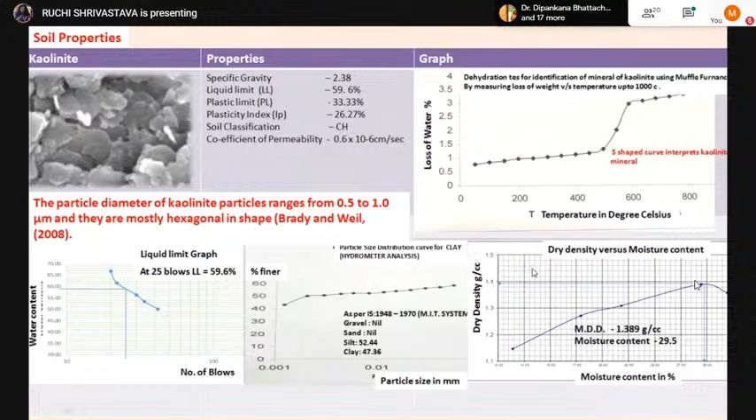We have performed the dehydration test for identification of the kaolinite mineral using a muffle furnace, and the curve shows that kaolinite mineral is present. Along with that, we have performed liquid limit, hydrometer analysis and dry density versus moisture content tests for the kaolinite soil. The soil sample is prepared with double the liquid limit and is pre-consolidated.

Sorry to interrupt, you have 1 minute left. Okay, so basically I'll directly come to the results and discussion.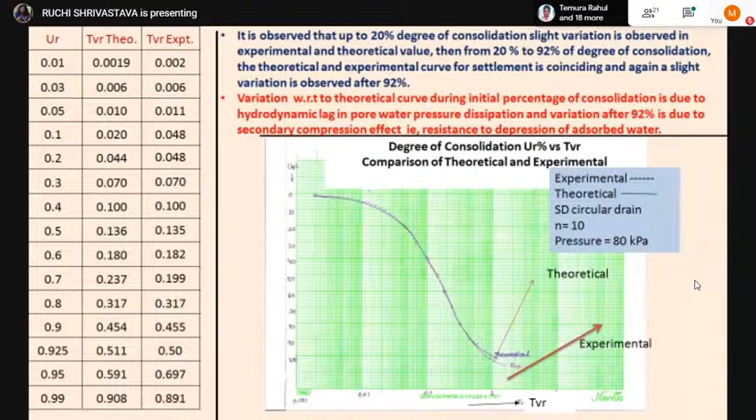So as already explained earlier, we have calculated the theoretical time factor using Barron's equation. Similarly, we can find out the experimental time factor using Barron's equation. By substituting the values of Ur, we get the theoretical and experimental Tvr values for various degrees of consolidation. A graph is plotted for theoretical and experimental Tr value versus degree of consolidation. It is observed that up to 20% degree of consolidation there is slight variation, and after 92% degree of consolidation there is slight variation, and there is a very good fitting between 20% and 92% degree of consolidation.

This is for the sawdust circular drain for n value of 10 at pressure 80 kPa. The variation initially observed is because of the hydrodynamic lag in the pore water pressure dissipation, and later it is because of the secondary compression effect, that is resistance to depression of the adsorbed water. Similarly, we have plotted for the different drain materials like sand drain, the JPPG drain, and the sawdust wick, and we can see that for the jute wrapped with polyamide polyester geo drain, the fitting of theoretical and experimental values is very good compared to the other 3 drain materials.

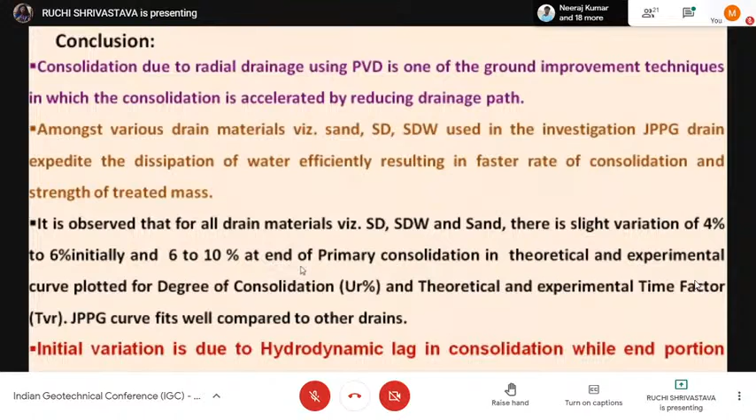Thus, I conclude that for all drain materials, 4 to 6% initial variation and 6 to 10% variation at the end of primary consolidation is observed in the theoretical and experimental curves plotted for degree of consolidation versus time factor. The JPPG curve fits well compared to other drains. Initial variation is due to hydrodynamic lag in consolidation, while end portion variation is because of secondary compression of soil due to depression of adsorbed water in the clay water system.

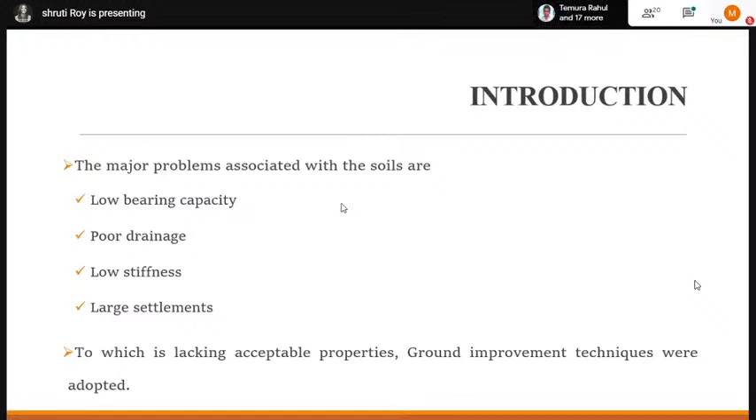So, in my research, major interest has been confined to the soft soil, usually considered as the most problematic soil due to inadequacy of bearing capacity, inadequate stiffness, drainage, and settlement problems. These reasons lead to the use of ground improvement technique. For soft soil, the stone column is assumed to be the best way to treat it. It uses three mechanisms known as reinforcement, densification, and consolidation to improve the soil.

Now, coming to the objective, my objective was to study the influence of various parameters like shear strength, area replacement ratio, etc., on settlement and deformational behavior of stone column. Coming to the methodology, I have used numerical analysis done using finite element method software, PLAXIS.

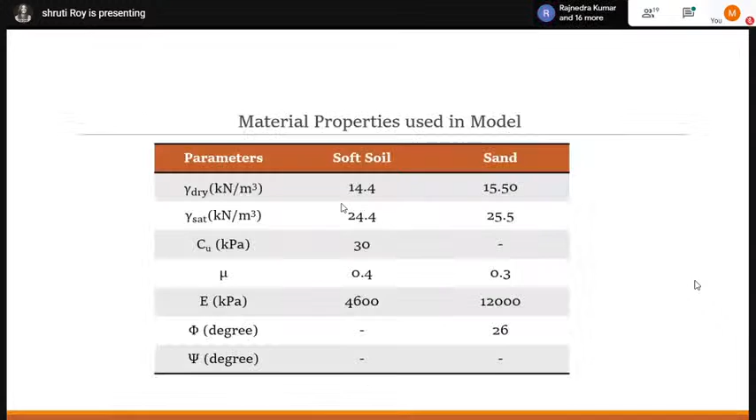In model preparation, this is the schematic diagram used by Nasir et al. The model used in the laboratory experiment by Nasir et al. has been simulated by me using PLAXIS 2D, and then a load settlement curve was observed. These were the material properties used in the model. For validation, the load settlement curve of Nasir and the one observed by me in PLAXIS were compared, and they were observed to be similar.

Hence, after the successful validation, further modeling was done, and around 7 parameters were observed, of which I'm mentioning a few with very visible results: the undrained shear strength of the surrounding soil, area replacement ratio of the stone column, slenderness ratio, and loading area condition. Since stone column is not bound by any binding material, we can only make it effective by balanced use of parameters that play an important role in its effectiveness.

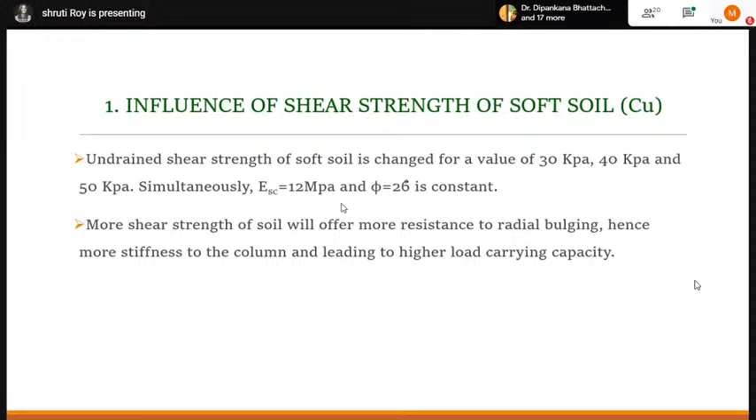The reason could be that when shear strength of surrounding soil increases, the passive resistance offered to the column from surrounding soil also increases. That makes the stone column stiffer and reduces the radial bulging, and hence we get more bearing capacity. This was the discussion from there.

Now, another parameter was area replacement ratio, basically the percent area of the soil replaced with the column. Here area replacement ratio was increased from 0.38% to 1.52% by increasing the diameter of the stone column, and load bearing capacity increased by a significant margin with increasing area replacement ratio.

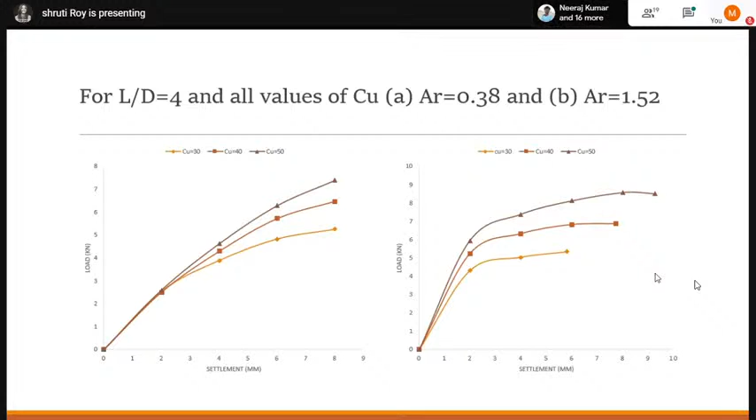Now moving to another parameter, the slenderness ratio of the column, or L/D ratio, done by changing only the length of the column and not diameter, here in my lab. I changed that ratio from 3, 4, 5, 6, and observed the effect on load settlement curve. The important parameter, stress concentration ratio, was seen increasing rapidly from L/D ratio 4 to 5. So it will be more optimum and economical to keep the L/D ratio between 4 to 5, which has also been witnessed in previous studies.

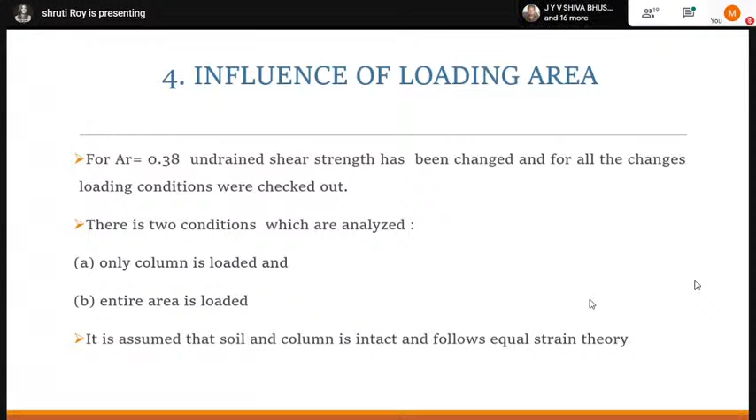Now coming to the loading area condition. There were two conditions: when only the column was loaded, and when the entire area was loaded. Keeping in mind the equal strain theory, we assume that both the column and soil will always be intact. What we found in the load settlement curve is that when only the column was loaded, settlement was higher compared to when the entire area was loaded. This was due to the equal strain theory, which is itself a vast topic, so we're not going into that. I also assumed other parameters, but results were not that beneficial.

We observe that with increase in shear strength of the surrounding soil, increase in area replacement ratio, and keeping the L/D ratio between 4 to 5, along with changing loading condition, load bearing capacity can be increased with a significant margin. We have to make a balance between these parameters to get a more effective stone column construction. These are the references. Thank you, I'll wrap up my presentation.

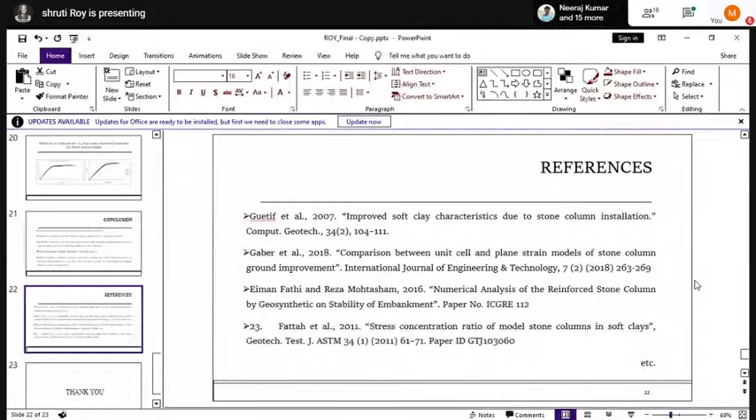Sir, can you hear me now? Yes, yes. I hope you can see my screen now. Yes, yes. Firstly, extremely sorry for the inconvenience from my end, and thanks for bearing with the technical glitch.

Coming to the topic, I'm Neeraj Kumar. I did my master's from IIT Bombay. I'll be presenting the effect of EPS geofoam on lateral earth pressure reduction in a retaining wall, as a numerical parametric study.

Coming to the contents, these are the contents for the current presentation. Getting into the introduction, the retaining wall is a structure that holds soil at a slope greater than its natural slope. These days retaining walls of various heights, ranging from 2 meters to 10 meters and above, are used. As the retaining wall height increases, the lateral earth pressures coming on these walls also increase. Higher lateral earth pressure results in large cross-sectional dimensions, making the structure huge and uneconomical. So various earth pressure reduction techniques are employed, and use of EPS geofoam as a compressible inclusion is one such technique.

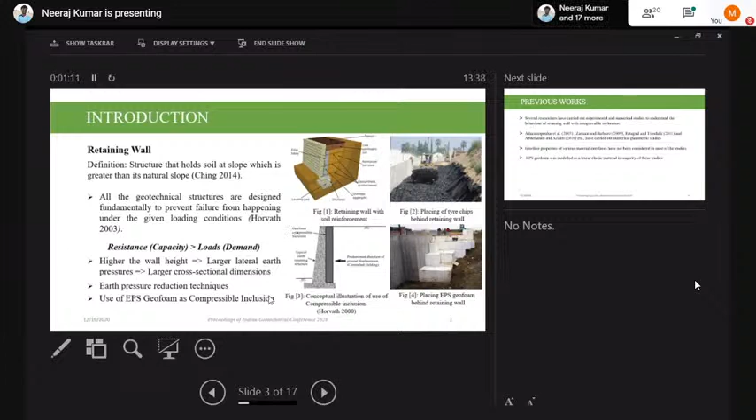Several researchers have carried out experimental and numerical studies in this area, and I have listed a few significant works. In all these works, the interface properties of various material interfaces in the system are not accurately captured or considered. EPS geofoam in all these cases is modeled as a linear elastic material.

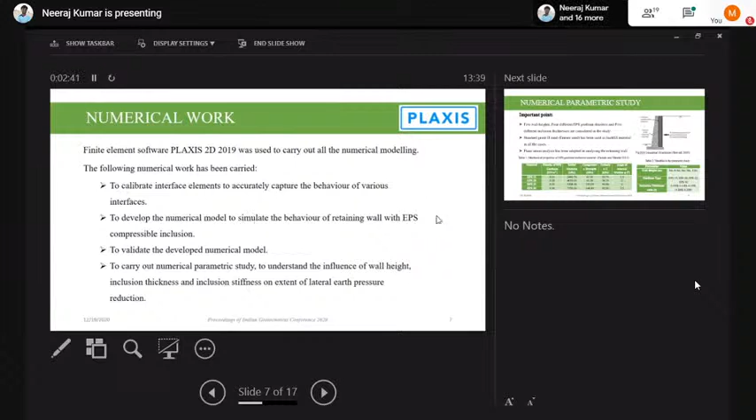Experimental work has been carried out to obtain all the material parameters required as input for the numerical modeling. I have listed the tests carried out, but due to shortage of time, I'm not getting into details. Coming to the numerical work, once we obtained the required material parameters from the experimental work, we proceeded to numerical modeling. Plaxis 2D software, a finite element software, has been used in this study. The following work has been done: development of the numerical model to simulate the EPS geofoam compressible inclusion, validation of the numerical model, and finally carrying out the parametric study.

In coming to the parametric study, we have chosen 5 wall heights, 4 different EPS geofoam densities, and 5 different inclusion thicknesses as part of the study. As a backfill material, we have used Ennore sand, which is standard grade 2 sand, and plane strain analysis has been adapted in analyzing the retaining wall.

Table 1 shows the mechanical properties of the different densities of geofoam that has been used, and table 2 shows the values of the different parameters adapted for the parametric study. Table 3 shows the parameters obtained for various materials and interfaces from both the experimental work done earlier as well as some of the other previous works.

After getting the required material parameters and input for the numerical model, we went on to develop a numerical model, as shown in figure 7. Figure 7 shows the geometry of the numerical model representing a retaining wall of height 6 meters with a geofoam inclusion of thickness 0.2h, which is 1.2 meters. Figure 8 shows the boundary conditions adapted in the current study, and figure 9 shows the details of the soil, the geofoam, and the retaining wall system.

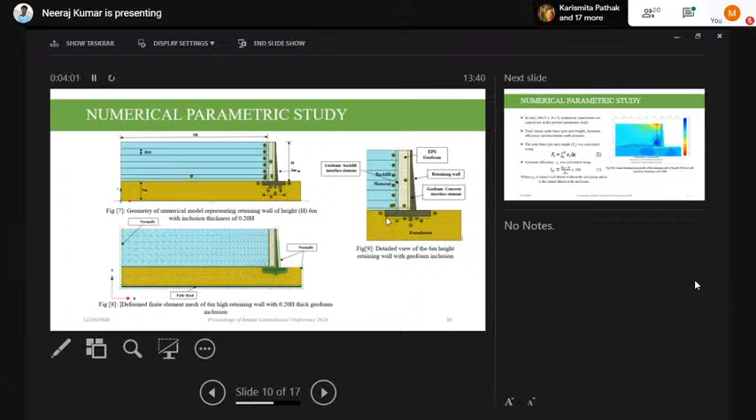Once the numerical model was developed, we validated it with the small-scale physical model from Ertugrul and Trandafir in 2011. Once the model is validated and we got a proper validation, we went on to proceed with carrying out the numerical simulations.

In total, we have carried out 100 numerical simulations, and to compare the effect of these various parameters, we have calculated the total earth force per unit length of the retaining wall, the isolation efficiency, and the maximum earth pressure. The total earth force per unit length has been calculated using equation 1.

The isolation efficiency, which gives the efficiency by which the earth pressure has been reduced by the compressible inclusion, has been calculated using equation 2.

Coming to the results, as you can see in figures 11 and 12, figure 11 shows the variation in the lateral earth pressure profile on the retaining wall. In this case, the EPS geofoam stiffness has been varied, whereas the height of the retaining wall as well as the thickness of the geofoam inclusion has been maintained constant.

Coming to figure 12, in this case we varied the thickness, whereas the height of the retaining wall as well as the stiffness of the geofoam has been maintained constant.

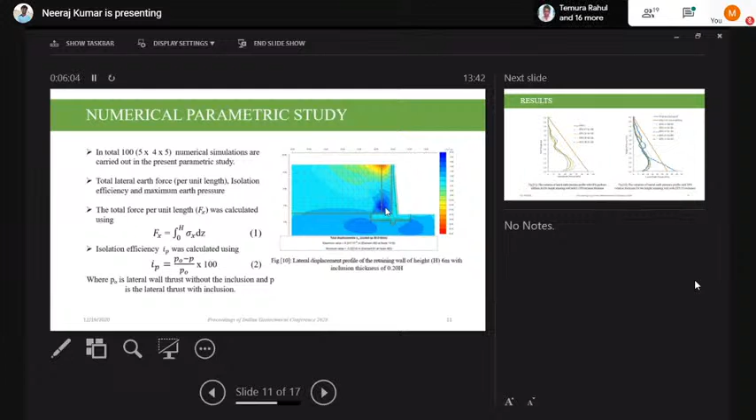It has also been noted that with the increase in the thickness of the geofoam inclusion, there has been a decrease in the lateral earth pressure profile along the retaining wall, and also with the increase in the stiffness of the geofoam, there has been an increase in lateral earth pressures.

The isolation efficiency was observed to improve with the increase in the relative thickness of EPS geofoam inclusion, given the stiffness is maintained constant. The maximum isolation efficiency of 46.6% was observed for a 6 meter high retaining wall with EPS 15 geofoam inclusion of thickness 0.25h, which is 1.5 meter thickness of the EPS geofoam.

When it comes to the height of the retaining wall, the isolation efficiency improved with increasing height up to 6 meters, and beyond 6 meters, when the height of the wall is increased, the isolation efficiency of the system kept reducing. Thank you.